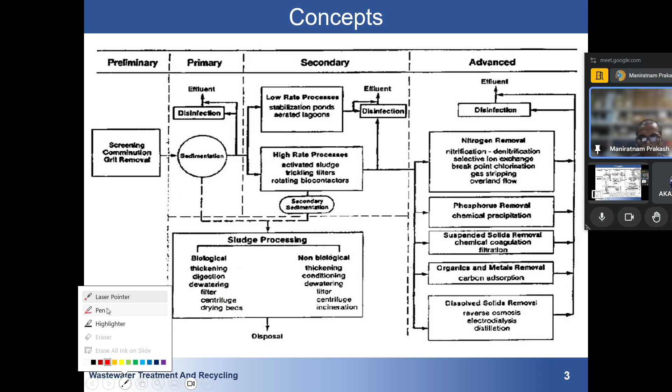So this is the background. If you see the preliminary treatment, we were collecting grit and all this. Similarly, in primary treatment we were collecting - you can see that our primary tank looks like this. This was our primary sedimentation tank. Here there was this settling zone, and at the bottom of the settling zone we saw that sludge was managed.

Then we have secondary treatment, that is biological treatment, and here we also see that organic components are degraded and decomposed with the help of microbes. So generally, in primary treatment we have inorganic sludge where the amount of inorganic content is high, but here in secondary treatment we will see that the sludge produced has a high amount of organic content.

In the upcoming slide we will look into the advanced process, which only starts after this secondary treatment. So in this lecture we will look into sludge processing - we have biological sludge that is generated from secondary treatment, and non-biological sludge, with high amount of inorganic content, that is generated in the sedimentation tank.

Okay, so I will just be going through some basic things, different terms which are used in sludge management. So the first topic is introduction to sludge management, which is what we were discussing.

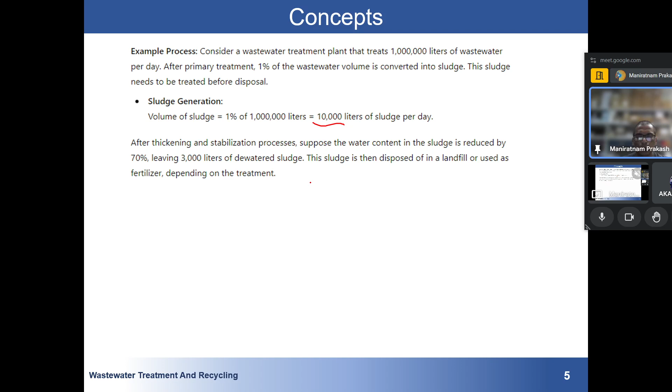So this is a kind of numerical question. After thickening, in the stabilization process, suppose the water content is reduced by 70%. Now we know there was one process - we have gone through different processes now, like thickening, so it's just saying imagine that 70% is thickened. So this much amount of dewatered sludge, this much liter, if 70% of water has been removed, then this much will again contain some sludge and some solid. Then this sludge is disposed of in land or landfill or used as fertilizer, depending upon the type of treatment which you have done. Depending on that, this can either be disposed of or reused.

Based on this, I have one numerical question: a wastewater treatment plant processes 5 into 10 to the power 6 liters of wastewater per day. During primary treatment, 2% of the wastewater volume is converted into sludge. The sludge initially has a solid content of 4% by weight. After dewatering, the solid content of the sludge increases to 25%. Then we have to calculate these three things.

That is volume of the sludge generated per day, and the mass of the solid in the sludge before dewatering. And the mass of dewatered sludge after the water content is removed. We have to calculate all these three things, so I will be going one by one.

So in the question, it's already saying that 2% is getting converted into sludge. Then volume of the sludge will be whatever the water is coming into, 0.02 into 5, that is 10,000 liter.

It was saying that the sludge has initially a solid content of 4% by weight, means whatever the weight is there, 4% is solid, and after dewatering, solid has increased to 25%. So we will be assuming some density, and we know the density of water is 1 kg per liter, and the mass of the sludge is the total mass. Then since 1 liter of sludge is equal to 1 kg.

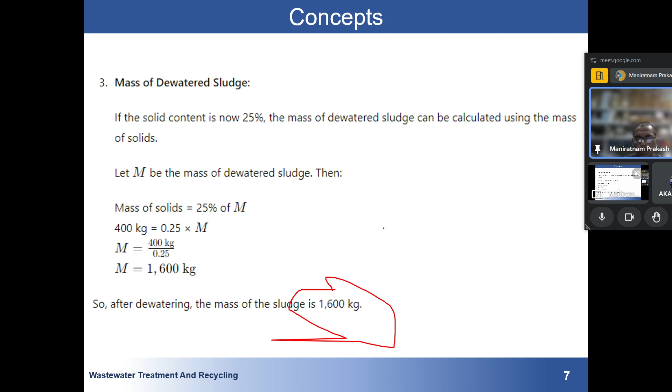So coming to the next topic, that is wastewater sludge quality and characteristics. Wastewater sludge is a semi-solid material that remains after treatment of wastewater. We already know that the quantity, quality and characteristics of sludge can widely depend upon the type of wastewater, the treatment process, and the efficiency of treatment plant.

Understanding the quality is crucial for proper sludge management. So if you know how much sludge is coming to you and what are the different characteristics, like how much organic content and inorganic content, then you can easily manage whether you have to do some kind of biological treatment. Suppose if high organic compound is there, then you will have an idea what you have to do.

You have to treat it aerobically or anaerobically, so that you can get manure and other such things. And if you are treating anaerobically, you will be getting methane also.

The quantity of sludge generated depends upon several factors, including the volume of wastewater treated and the efficiency of treatment process. It is usually expressed as a volume or mass per unit of treated water. So you can remember that whatever amount of water is coming into our system, depending upon the efficiency, suppose if 90% efficiency is there, depending upon that we will have sludge production.

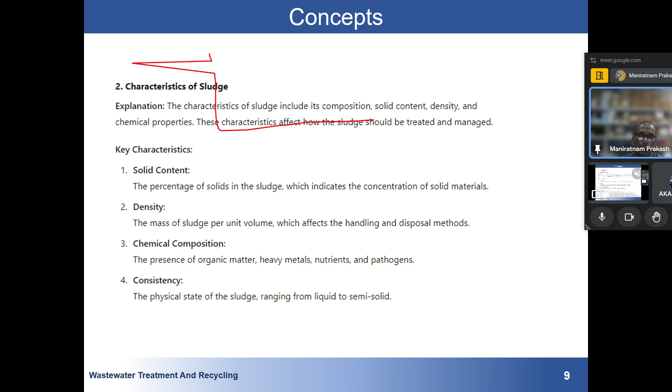So knowing the density matters because sometimes in your treatment plant, sludge production happens at one location and sludge management happens at another. So you have to carry your sludge from here to there.

So if you know the density of your sludge, then suppose if you are using one truck that has a certain capacity, by liter or by kg of sludge weight it can take in one trip. You already know the volume, how much volume is coming, and if you know the density, you can calculate the mass.

Then you can calculate that in a single trip the truck can take this much amount, and if three times that amount of sludge has been produced, then the truck will be making three trips from here to there, so you require three trucks.

Then chemical composition, the presence of organic matter, heavy metal, this is important. Depending upon how much organic matter is there, the sludge will be used as manure or for production of methane. If heavy metal is there, then we can extract the heavy metals and further process it. If toxic heavy metals are there, we have to dispose it in a proper landfill. If pathogens are there, it can spread through water and through air, so we have to take proper care of that.

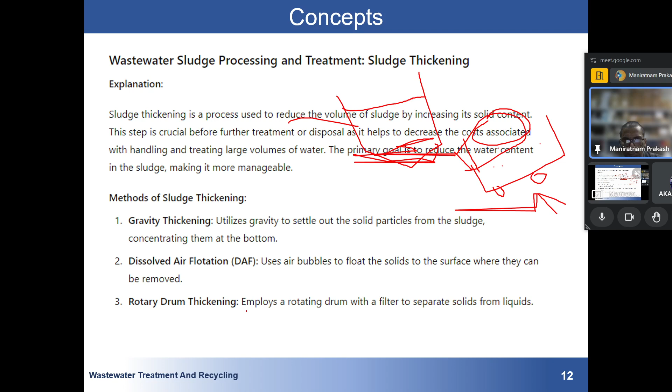We will pass air through these holes, and what will happen is all the solids will start coming to the top, and we can remove those solids. Then we have rotary drum thickening, which uses a rotating drum with a filter to separate the solids and liquid. Sludge will be kept here, and there is some arrangement where the solids get separated. You can search online to find more about rotary drum thickening.

We have another question related to this topic: a sludge thickening system is designed to operate at a flow of 50 liter per minute. The system operates for 24 hours. The sludge entering the system has a solid content of 2% and leaves with a solid content of 10%. Calculate the total mass of solid entering each day and the total mass of solid leaving the system each day, and determine the mass of solid removed by the system each day. So you have to calculate three types of mass. You can assume the density from the previous question if needed.

If you have to assume any kind of density, you can assume the data from the previous question. Okay, so I will give you.

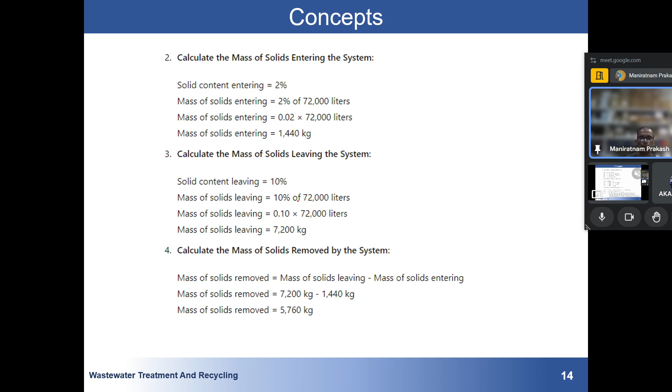I hope this is okay to you. Then finally we have wastewater sludge processing and treatment, covering sludge stabilization and conditioning.

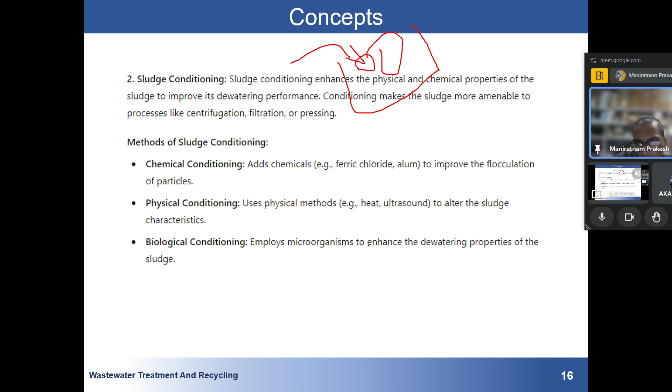If we want to settle the solids present in our sludge, we add some chemicals, and with time it will just settle down. Physical methods can alter it using heat or ultrasound. Then we have biological conditioning, which employs microorganisms to enhance the dewatering process, since somehow we have to remove the water. Now again we have one question related to that topic.

A wastewater treatment plant processes a certain kg of sludge daily with an initial solid content of 2% by weight. The plant utilizes lime to condition the sludge, which increases the solid content to 6%.

Remember, the amount of solid is fixed. If solid content is increasing, remember the water is going away from our system. Nothing is happening to our solid.

The lime addition process is desired to improve the dewatering efficiency by reducing the volume of sludge by 60%. Whatever volume is coming, 60% reduction means only the volume of water is being reduced, because we don't want to throw away our solid.

If some efficiency is there, like if the system is working 100% efficiently, all the sludge stays in the system. If the system works at 90%, then only 90% of solid remains in our system. If the density of the conditioned sludge is approximately 1.3 kg per liter, calculate the final volume of conditioned sludge produced daily and the mass of lime added, if 10 kg of lime is used to condition 1000 kg of sludge.

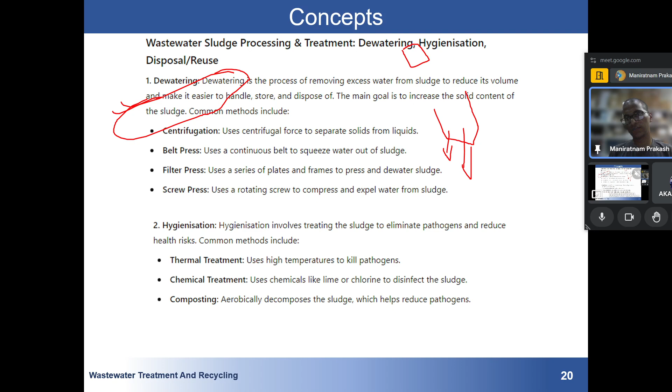Then we have belt press. There will be one rotating facility, then a belt will pass over this, and sludge will be passed through in between. As it is pressing, the water will escape from the system, and the sludge will get collected at another end. Then again we have filter press, and screw press. These are some kind of mechanical mechanisms via which we can reduce water.

Then we have another process known as hygienisation. Hygienisation involves treating the sludge to eliminate pathogens and reduce health risks, using high temperature to kill pathogens.

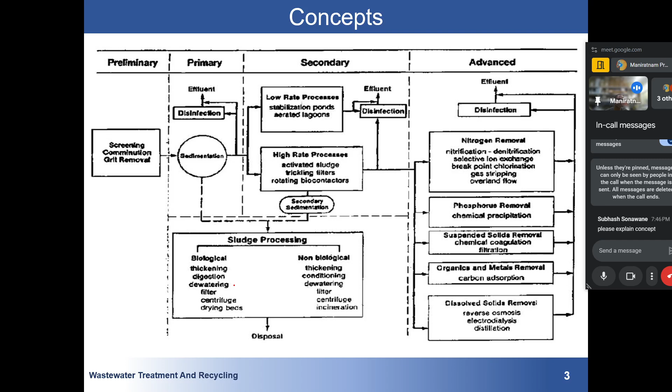Sludge is nothing but a semi-solid byproduct containing organic matter. Semi-solid means there will be water and there will be some solid, and a huge amount of water will be there. Now, density of the sludge generally varies between 1 and 1.5. We will be seeing some numerical questions now, generally between 1 and 1.5.

During management, we know our final aim is to get some byproduct. To get that byproduct, there are different processes we have to manage. Either we can throw it in a landfill, but first we have to remove the water. So to remove that water, there are different facilities we will be looking at, and once the water is removed, whatever solid remains, we can either dispose of it or do other things with it.

So the different processes in sludge management: the first is known as thickening. Initially a huge amount of water is there, so before doing any advanced treatment, we first want to extract the water, reducing the water content of the sludge. Then the amount of water will still be high, but less than the initial value, and there will be some solid, which will generally be organic in content, producing some odor and pollution.

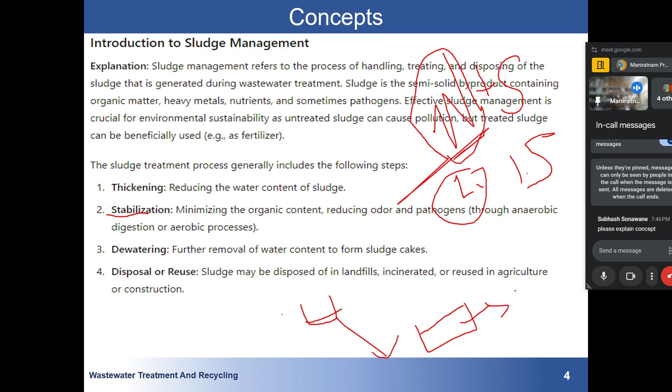That solid can either be disposed of or reused. Depending on our treatment, it can be disposed of in landfills, incinerated, or used in agriculture as fertilizer, or at a construction site. It all depends on the quality.

So here is one question related to this topic — try to solve it. Those who have just joined, try to solve this question too.

Assume a wastewater treatment process handles this much liter of wastewater per day. During primary treatment, 2% of the wastewater volume is converted into sludge. The sludge initially has a solid content of 4% by weight. After dewatering, the solid content of the sludge increases to 25%. You have to calculate three things: volume of the sludge generated per day, mass of the solid in the sludge before dewatering, and mass of the dewatered sludge after water is removed.

Take your time. If you have to assume any data, you can assume it.

This is a very simple question. Remember, as I said, there is a system: suppose primary treatment was done, so this much water was coming in, and 2% of that water got converted into sludge. Now in this sludge we have to remove water. It's saying that the sludge contains 4% solid content, and here you will need density, so you can assume density equal to 1 kg per liter.

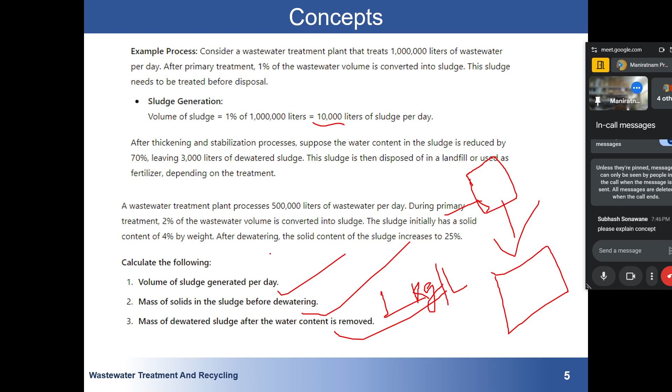So I am going to the solution. You can see that the volume of sludge generated per day is 2% of whatever solid wastewater was coming in. So the volume of the sludge will be 10,000 liters.

This was very simple. For the mass of the solid, I have assumed 1 kg per liter density, so the mass of the sludge equals its volume in kg. The total mass of sludge is this much. Since I assumed the density of the sludge is also 1 kg per liter, the mass of the sludge equals the volume, that is 10,000 kg, and 4% is the solid.

So 4% of this will be the mass of the solid. Before dewatering we have 400 kg — remember this 400 kg. This was very simple. Now one thing has to be understood: remember, suppose initially there was some water content and initially there was some solid content.

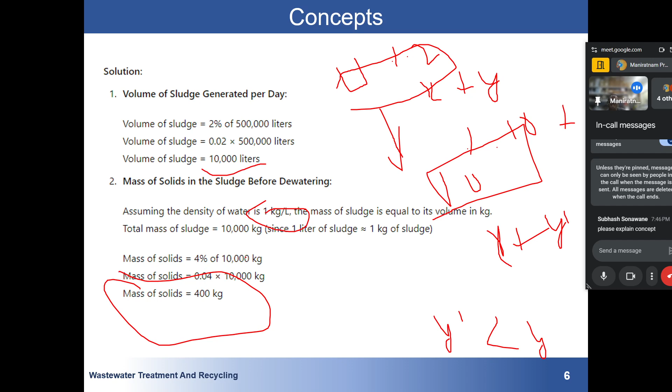So you can see that this much kg of sludge was coming into the system, and after dewatering we have this much kg of sludge, 1600 kg of sludge. I hope this is clear to you.

If anyone has any kind of doubt, you can just ask. Both of you, have you understood, all persons who are there? Four people are there or three people are there? Sobhan and Subhash and Akash.

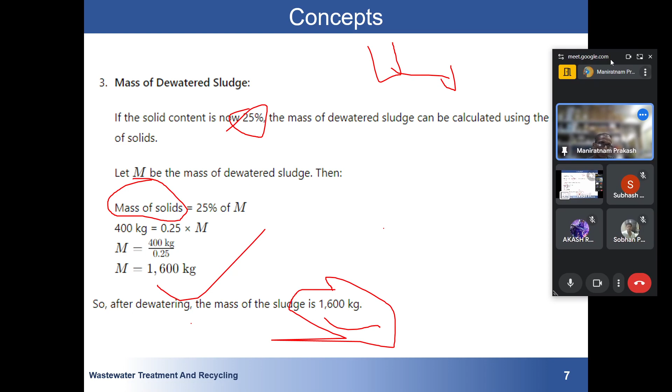If you have understood it - I was just explaining there is one quality of the sludge, how much quality of the sludge you should know. Depending upon that, you will be designing your treatment method, and it generally depends on how much wastewater is being treated. Then we have characteristics of sludge, that is solid content, what is the density, what is the chemical composition, and all these things. So that will be the characteristics of sludge.

Here I have already said what you have to assume. You have to assume the density of wet sludge and the dewatered sludge as 1.1 kg and 1.2 kg per liter.

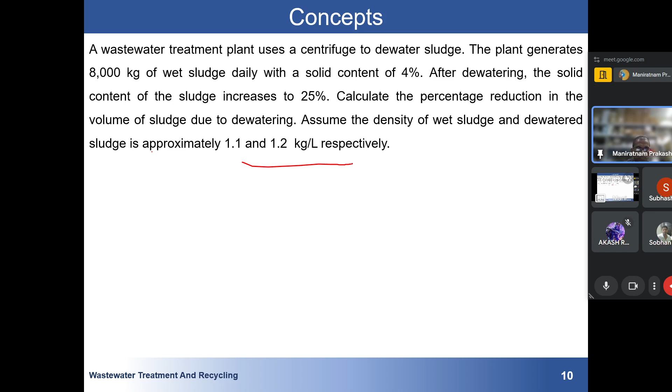Okay, so I'm calculating it. First we will be calculating the mass of the sludge. Initially it is saying that initial solid content is 4%. The mass of the solid will be 4% of 8,000 kg of the sludge, that is 320 kg.

Now we will be calculating the volume of the wet sludge. Density is already given to you as 1.1, and we know that the wet sludge is 8,000 kg, so the volume will be 7272.73 liters. I hope these two steps are very clear to you.

As we have to calculate the volume reduction, so we'll be calculating volume.

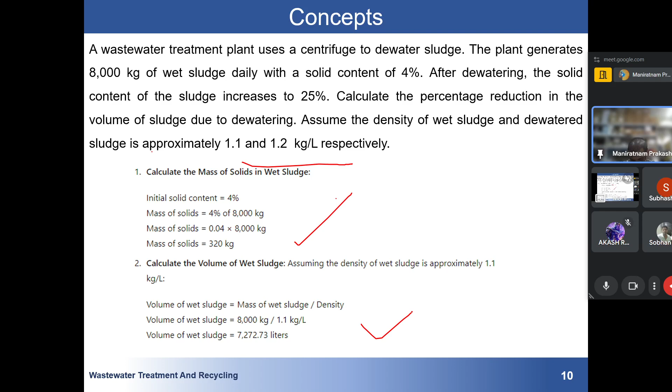Now let's calculate the mass of dewatered sludge. Again, this 320 will be fixed. So we will be utilizing this formula: mass of the dewatered sludge is mass of the solid divided by solid content. The mass of solid will always be the mass of sludge into solid content. The mass of the solid is 320 kg, that we found from here, and the solid content is 0.25. Then the mass of dewatered sludge will be 1280 kg.

And we have assumed that density is equal to 1.2 kg per liter. So the volume of the dewatered sludge will be the mass of dewatered sludge divided by density. So initially we have this much volume of sludge, after dewater we have this much volume of sludge. Then reduction can be calculated by initial minus final divided by initial into 100.

We will be putting it in. So you can see that there has been a reduction of 85% in the volume of the sludge.

Now if someone asks why we are reducing the volume, can someone answer it? Why are we reducing the volume of the sludge?

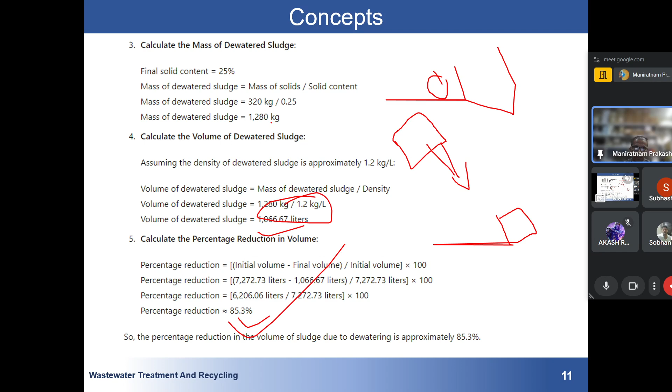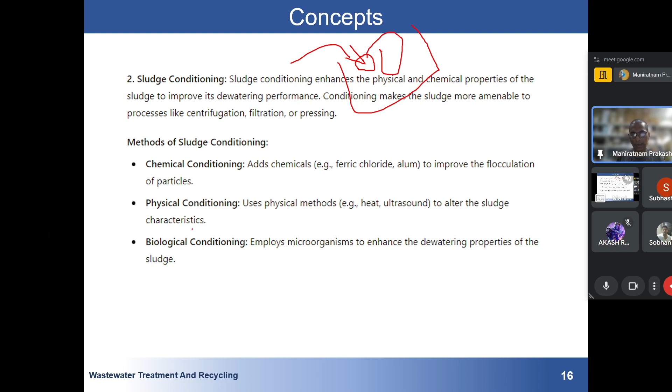As I was saying, different processes are anaerobic digestion, aerobic digestion, lime stabilization. In lime stabilization we add some type of chemicals. Now in sludge conditioning we are also adding some chemicals, biological. Again there was one question related to lime, how much lime we have to add. So I'm moving forward because no one is responding.

Now if you start solving this question, I might wait for you. You don't have to.

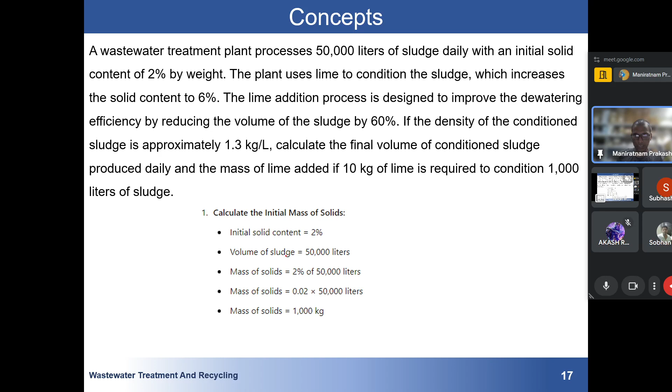Then here it is saying that initial solid content is 2%. Volume of the sludge is 50,000 liter, mass of it is 2%. And I have assumed again that the sludge which is coming has a density of 1, so the mass of solid will be 1,000 kg. Now again I have assumed 1 kg per liter. Then finally 6%, the mass of dewatered will be mass of solid, and we know that the mass of the solid will be fixed.

So mass of solid divided by solid content gives mass of dewatered sludge, this much. In the question, density of the condition sludge is given as this much. Volume of the sludge will be mass of dewatered sludge divided by density, so this will be the volume of the dewatered sludge.

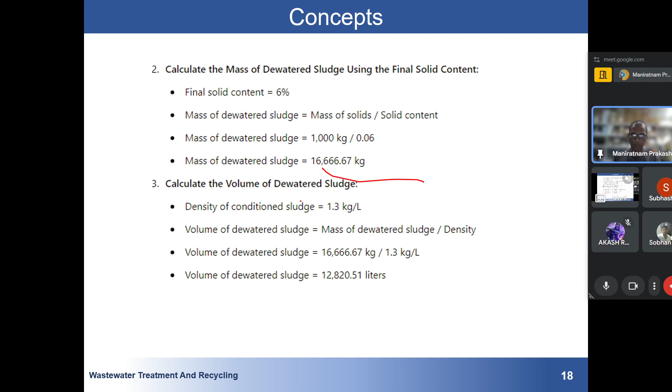Condition sludge means dewatered sludge, you can say. The initial volume is 50,000 liters, reduction is 60%, so the final volume will be this much liter. So this was the same question but in different terms.

Now, lime required is 10 kg per 1000 liters, and total volume is 50,000 liters, so lime required will be 500 kg. I hope this is very clear to you.

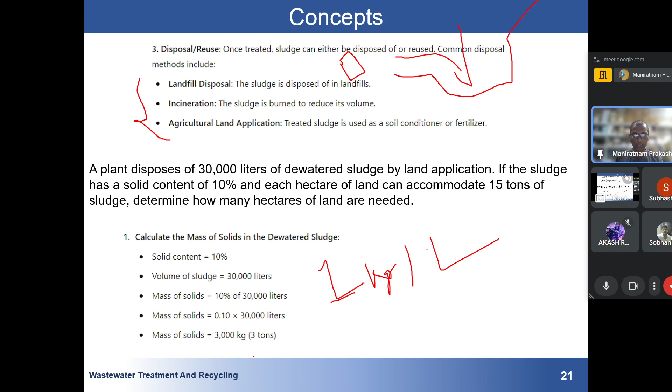Then again we were discussing about disposal and all this thing. A simple question was there: this much water is there, 10% solid content, then how much land will be required? So 10%, 0.1, 3000 kg density, we have assumed 1 kg per liter, then 3 ton, then 15 ton of the sludge. Total mass is 3 ton, then number of hectares required will be 0.2 hectare. This question I have not discussed.

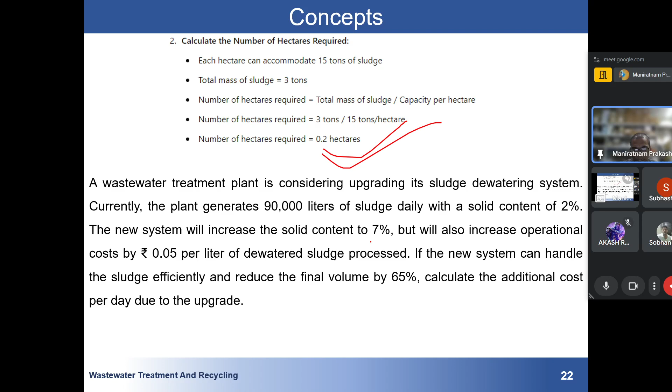Finally we have dewatered sludge using this final value. Now we know that this much solid will always be fixed, and the final solid content is 7%, that is after this thing. Finally we have 7%, so the mass of the solid will be this much divided by 0.07, then mass of the dewatered sludge is this much kg.

In the question it is written that the dewatering process reduced the volume by 65%, so the final volume will be 35% of the initial volume, and initial volume we have is 90,000 liters. So final volume will be 0.35 into 90,000 liters, that is final volume equals 31500 liters.

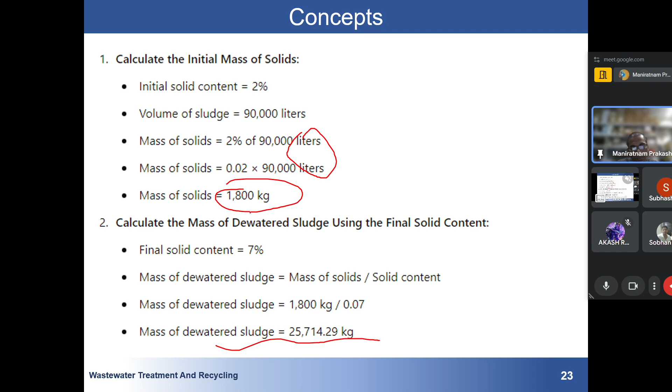Now, additional cost per liter is 0.05. Remember what we have used here: the concept that after dewatering, one thing which is fixed is our mass of solid. We have used the concept of that thing. Whenever we are dewatering, increasing or decreasing our solid content, the mass of solid is fixed, only the volume of water is changing. Due to that, there will be increase or decrease in solid content.

So again, the final volume will be 31500 liter, and additional cost per liter is 0.05. So additional cost will be additional cost per liter into final volume, which is 1575. So to upgrade to the new sludge dewatering system will result in additional operational cost of 1575 per day. I hope this is clear to you.

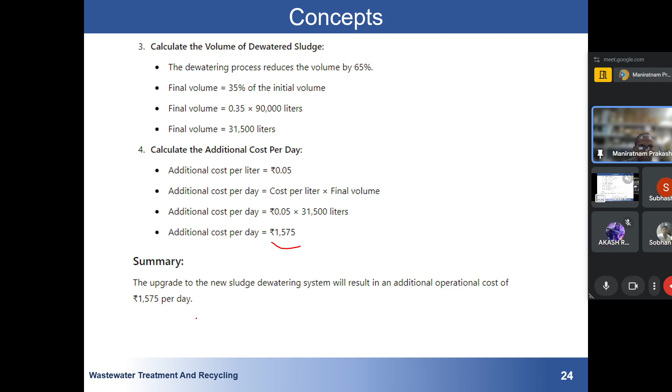So these were some of the few concepts which I have discussed today. Now we have the same question again which is being asked to you in the assignment, so try to answer this ABC multiple choice question.

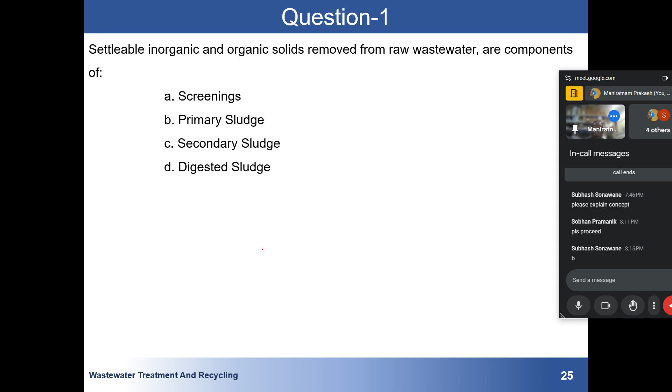So we will be looking one by one. In wastewater, three types of sludge are generated.

Various types are as follows. At a screening chamber, materials like plastic, paper, and rags are removed from the raw wastewater through the screen at primary preliminary treatment. They are not considered sludge.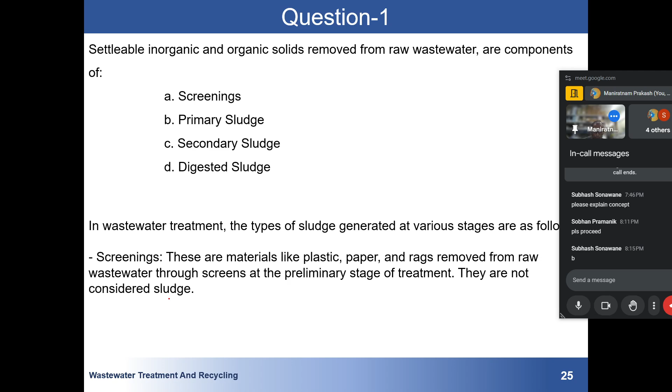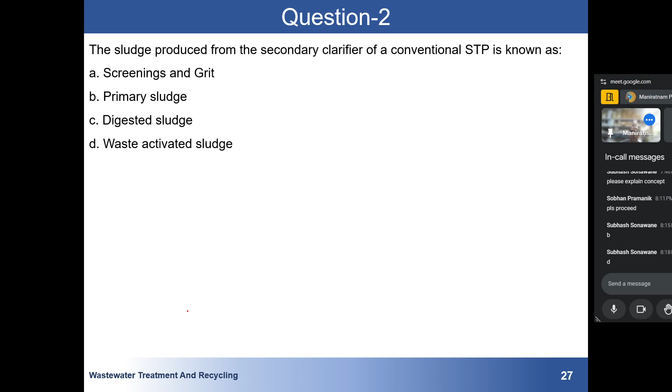Screening and grit are materials removed during the primary preliminary treatment. Screening includes large debris like plastic and paper, while grit consists of inorganic material like sand and gravel. These are not produced in the secondary clarifier.

The primary sludge is generated during the primary treatment stage where settleable solids are removed from the raw wastewater. It is different from the solids produced in the secondary treatment. We already discussed this.

Then finally we have digested sludge. This is sludge that has undergone anaerobic digestion. We have already discussed all these things.

Then we have waste activated sludge. This sludge is produced from the secondary clarifier as a result of biological treatment. We have discussed this. It consists of the excessive biomass generated by microorganisms during secondary treatment, which is then removed and requires further processing and disposal.

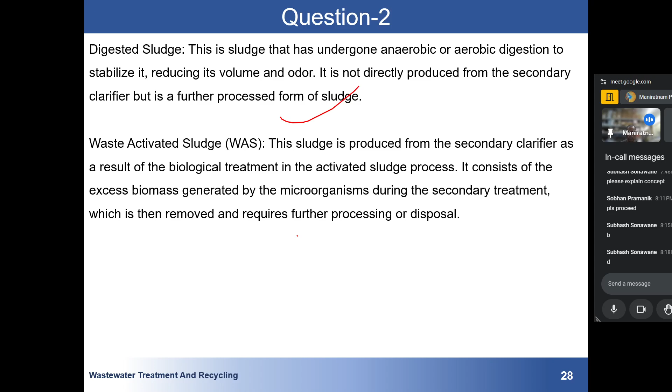So yes, you are correct. From the STP, sewage treatment plant, we have this waste activated sludge. So this will be our correct answer.

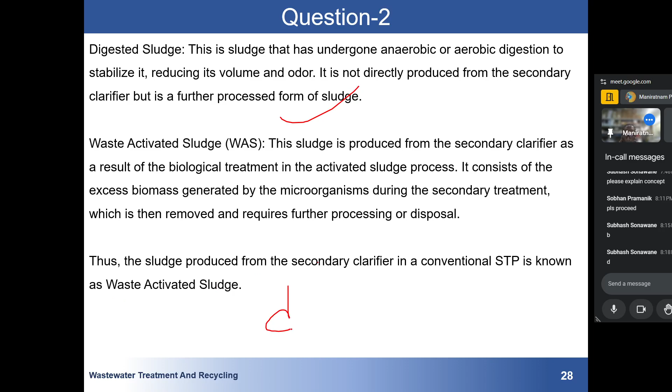Let me see what is the answer.

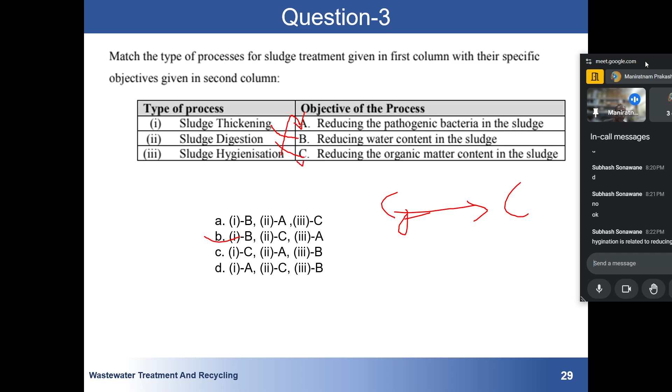So here you can see also this sludge thickening: aimed at reducing the water content in the sludge. By concentrating the sludge, it becomes easier to handle. Thus, the objective is B.

This involves breakdown of organic matter by microorganisms in the sludge. The primary goal is to reduce organic content and stabilize the sludge. Thus, the answer is C.

Finally, sludge hygienisation is to reduce the pathogenic bacteria in the sludge to make it safer for disposal or reuse. We don't want to throw our sludge which contains high amounts of bacteria and all these things. I hope this is okay to you, I hope you have understood it.

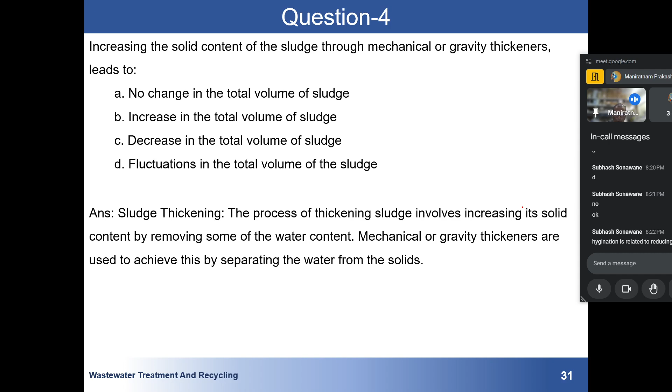This is a very simple question. Sludge thickening: the process of thickening involves increasing the solid content by removing the water content, mechanically or by gravity thickener, achieved by separating the water from the sludge. Okay, so the thickening...

So you can say that when we are thickening it, we are just reducing water content. So the overall volume of the sludge will decrease. So the answer is decrease in the total volume, that is answer C.

So you can see mechanical thickeners are used, mechanically, by rotating drums and all these things. Gravity thickeners we have. Then impact of volume: decrease in total volume as the water is removed. The volume occupied by the sludge decreases because the remaining sludge has a higher concentration of solids. The overall volume of sludge reduces with the water content. I hope this is clear to you.

C, yeah, C is the correct answer. Good.

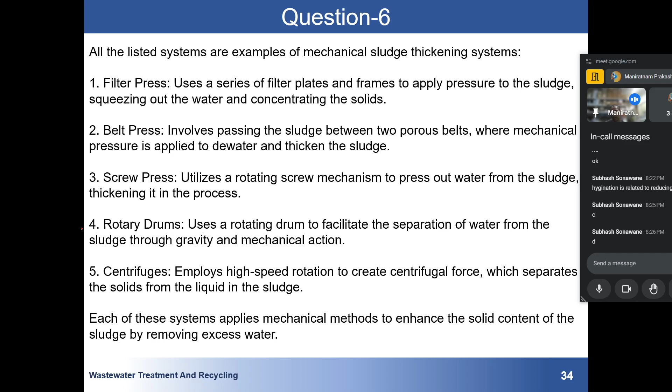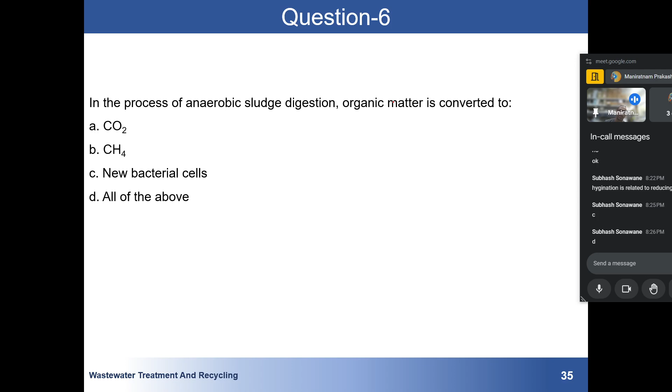Please answer this question. In the process of anaerobic digestion, organic matter is converted to... So we will be seeing this thing. In anaerobic sludge digestion, several key biological reactions occur. Here are the primary ones. So we know that there are four processes, and then we have bacterial growth also.

So first will be hydrolysis, such as complex organic matter being broken down into simpler compounds. Complex organic matter will be there, it will break into simple sugar plus amino acid plus fatty acid. That is, if sucrose is there, which is very complex, then it will be broken into glucose and some other forms.

Then we have acidogenesis, meaning formation of acid. Simple compounds are converted into volatile fatty acids, hydrogen, carbon dioxide, and other byproducts by acidogenic bacteria. The simple sugar which was here, so initially it was here, so again what will happen is this will be converted into some acetic acid and some other kinds of acid also.

This means different kind of acid along with hydrogen and CO2. Yes, you have given D. Then we have acetogenesis, that is formation of acetic acid. Volatile fatty acid and alcohol are converted into acetic acid, hydrogen, and carbon dioxide. So again, what will happen is...

All the acid which is there will be getting converted into acetic acid with another bacteria. And finally, this will be converted into methane. Okay, now,

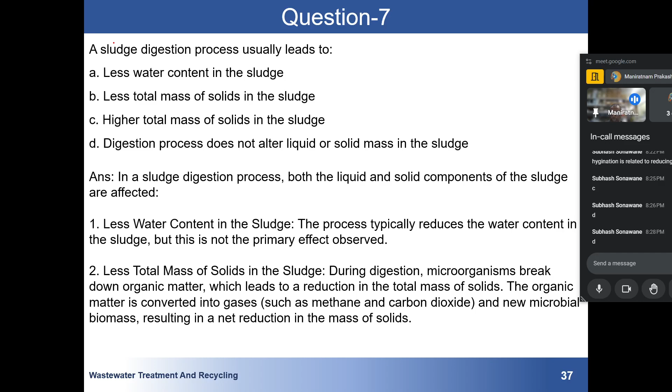I hope this was also a very direct question. The higher total mass option is not correct, as the digestion process generally reduces the total mass. Remember, we are talking about digestion. Digestion means we are digesting organic matter. So if we are digesting organic matter, it's simple: the mass of the organic matter will decrease. So the correct answer is B.

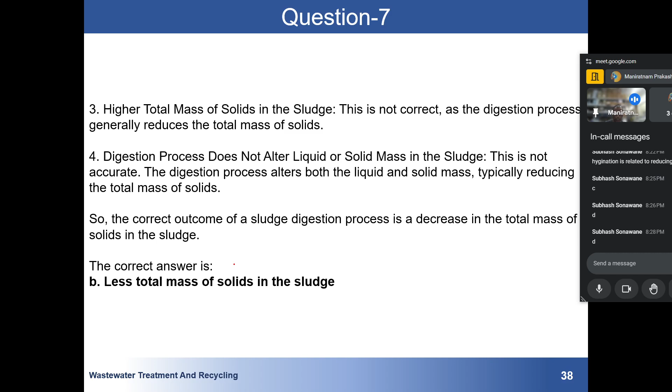Please participate, I don't know why you are not participating. The higher total mass of the sludge option is not correct, as the digestion process generally reduces mass during digestion. The option that digestion does not alter liquid is also incorrect; digestion process alters both liquid and solid, but the amount of liquid altered is very less. So the correct outcome is a decrease in the total mass of the solid in the sludge.

Question number 8: coagulants such as ferric chloride, alum, or organic polymers may be added to wastewater sludge for sludge stabilizing, sludge thickening... Remember the process and you will be able to answer this question. What is sludge stabilization? What is sludge thickening? What is sludge conditioning? What is sludge hygienisation?

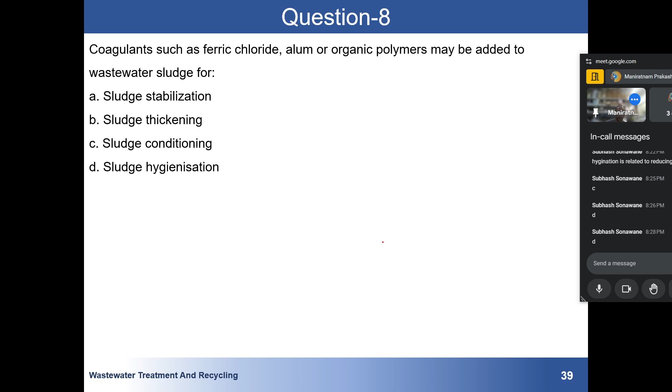So the correct answer is sludge conditioning. Coagulants such as... because we have already discussed what is sludge stabilization, so I have not rewritten it. No, I have written it. So coagulants such as ferric chloride, alum, or organic polymers are typically added to wastewater sludge for the purpose of sludge conditioning. The primary purpose of adding coagulant is to condition the sludge.

Conditioning improves the dewatering characteristics of sludge, making it easier to separate water from solid during the dewatering process. Remember, we want to remove the solid and all these things, so for that we add some kind of chemical. What happens is they agglomerate and form some kind of flocculants, and they can be easily removed. So for that we use this kind of salt, that is ferric chloride, alum, or organic polymer.

Mechanism: coagulants work by destabilizing the particles in the sludge, promoting flocculation and enhancing aggregation of sludge particles. This leads to better removal. Now remember this mechanism: suppose if you have sludge and all the solids are randomly distributed, and you pass it through a process, there will be some reduction in solid. But now imagine another process where you have added some chemicals and those sludge particles have formed some kind of lumps. So which one will be easy to remove? Obviously this one will be easy to remove.

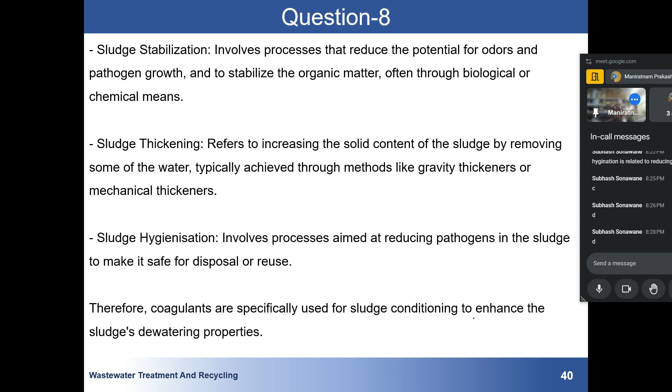Now question number 9: sludge drying beds are one of the simplest methods of dewatering, but they have a larger land footprint.

Dewatered sludge essentially has zero or near zero water content. Remember, no sludge has zero water content, so obviously this statement is incorrect. So my answer will be either A or D.

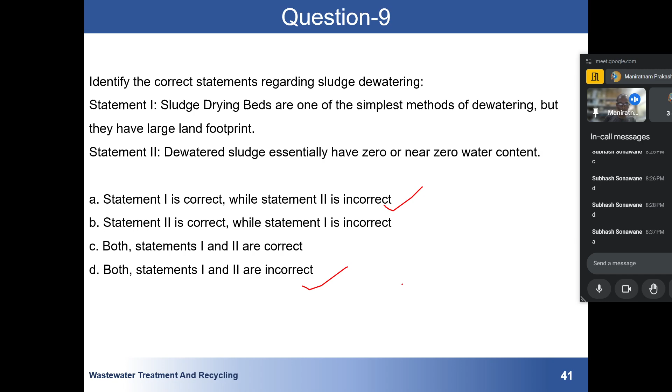Now just think about whether statement one is correct or not. You have answered A. Okay, so I will be moving forward. Yes, the correct answer is A.

We have to know the reason. The sludge drying beds are one of the simplest methods of dewatering, but they have a large footprint. This is correct: sludge drying beds are indeed simple and low cost methods for dewatering. However, they require a large area of land due to the need for extensive surface area.

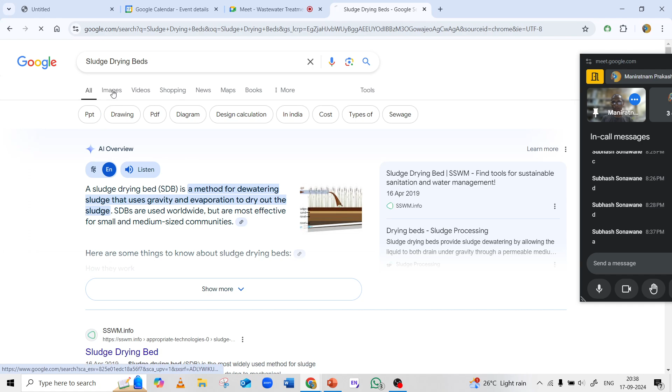So I will show you how big it is. You can see that sludge drying beds require this much large amount of area, so a huge amount of land is required. These are general sludge drying beds, and that's why a huge amount of area is required.

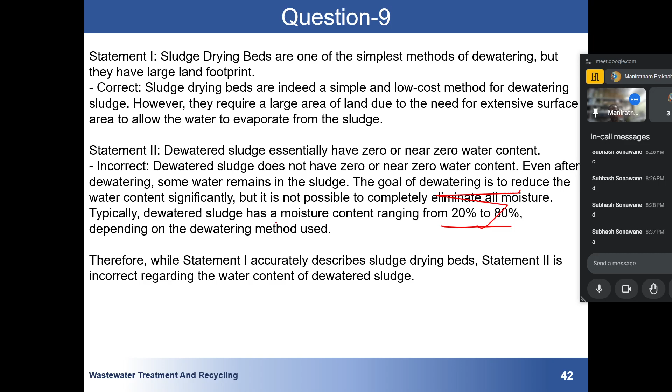Generally, it is on the higher range only, around 80%. So yes, A was our correct answer. Coming to question number 10.

Identify the appropriate option for the use of wastewater sludge: sludge can be used to produce bioenergy, digested sludge can be used as compost or fertilizer, incinerated sludge can be used as building material, or all of these.

Each option listed represents a viable method for reuse. Sludge can be used to produce bioenergy - correct, since sludge, particularly from anaerobic digestion, can be used for production of bioenergy in the form of biogas, which can be utilized for energy generation. Digested sludge can be used as compost or fertilizer - correct, since after digestion, sludge can be treated further to produce compost or fertilizer, and the treated sludge, rich in nutrients, can be used to improve soil.

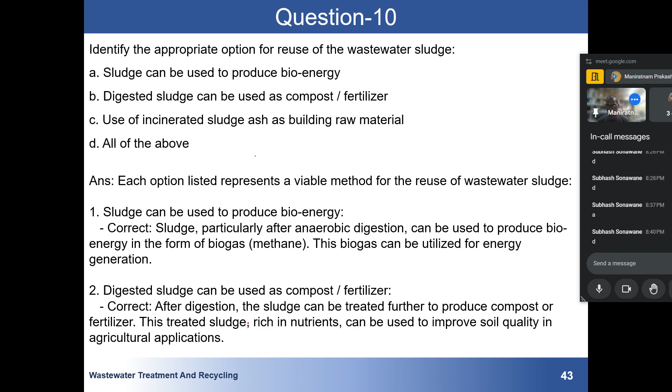Yes, this is also a correct answer, so the answer is D, all of the above. Ash from incinerated sludge can be used as a raw material in construction, such as production of bricks, cement, or concrete. This helps in recycling the ash and reducing the environmental impact. Thus, all the listed options are appropriate.

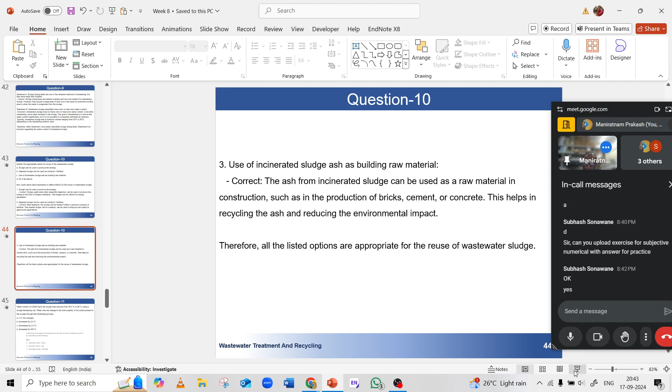Remember, theoretically what I've said, dry solid. Try to answer what is the net change in the total quantity of dry solid. It should not take any time. I have already discussed so much numerical question today.

This was a theoretical question, not a numerical question, but still I am trying to answer it. To calculate, see, initially this much amount of water was there, finally this much water content was there. So what will happen, if your initial water content is this, dry solid will be 1.5%. You don't have to worry, just remember the amount of solid never changes. The answer will be 0%, but I am showing how this 0% is coming.

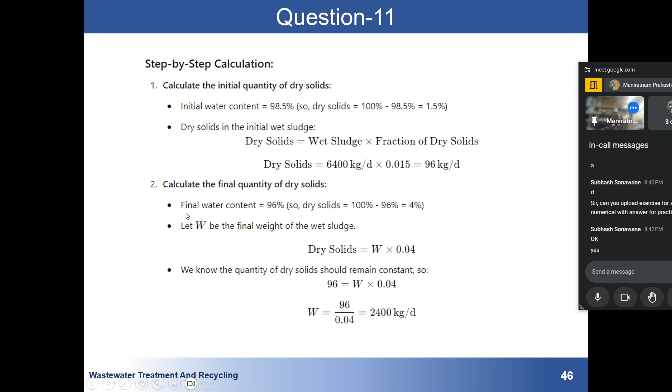So you can see the net change is 0%. The correct answer will be A. Just for sake of convenience I have shown you these things, but these are not needed. By seeing this question, as they are saying the total quantity of dry solid, there only you could have marked answer A. Okay, now coming to the question number.

The ratio of volatile to total solid is 0.75. The sludge is further digested where 72% of organic compound - generally organic compounds are volatile - so what will happen is that if you give a small amount of heat, it will evaporate. Now generally carbon will be converting into CO2.

Neglecting any loss, remember, if you study this total solid chapter from a book, the temperature required for converting this volatile solid - to find the volatile solid we use a temperature of 600 degrees Celsius. So the definition is that which can be easily converted, but the temperature required is around 600. Remember this thing, don't get confused.

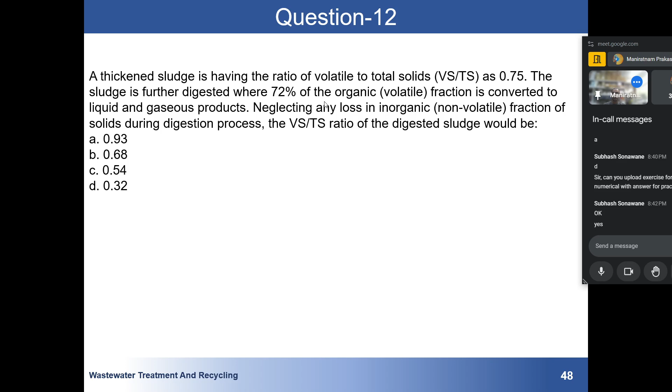Neglecting any loss in inorganic fraction of the solid, the total Vs by Ts of the digested sludge, and after 72% conversion, what will be the ratio of digested sludge? So we will be looking at it here. Volatile solid in undigested solid is 0.75 into total solid, that is given to us. So non-volatile solid will be 1 minus 0.75 into total solid, that is 0.25 total solid.

This non-volatile will remain in our system. 72% is lost, or 28% is remaining. So remaining volatile solid will be 0.28 into 0.75 of total solid, so remaining is 0.21 of total solid. This is very simple. So total solid is non-volatile solid plus remaining solid, that is 0.25 into total solid plus 0.21 into total solid, that is 0.46 total solids.

So we have to find the new ratio. The new ratio will be whatever volatile solid is there, that is remaining 0.21 total, by total ratio, that is 0.46 total. So the ratio will be around 0.68. This was a simple question, I can say, just you have to do some kind of manipulation from here and there.

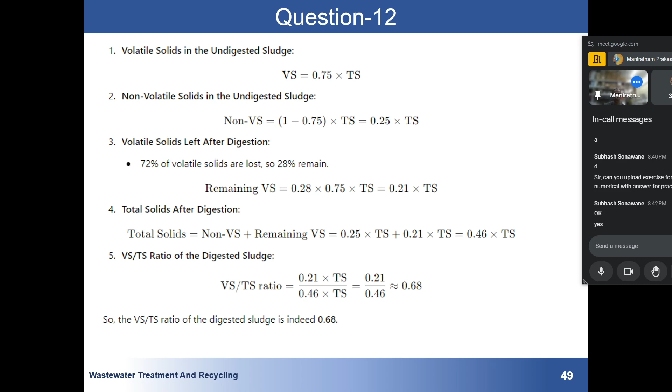Okay, I hope this is clear to you. Again, a question related to what I have already discussed, but still I am going through it.

A secondary clarifier of an activated sludge process produces a certain amount of wet sludge containing 1.8% weight by weight solid content. The sludge is thickened to increase the solid content to 5%. The thickened sludge has a specific gravity of 1.9. The solid fraction is 80% organic, 20% inorganic. The thickened sludge is further processed in an anaerobic digester, and the final amount of dry solid after digestion is 240 kg per day. Based on this information, answer the following questions.

The total amount of dry solids in the thickened sludge - this is very simple. The wet sludge amount is already given to you, 37,000 kg per day with 1.8% solid content, so initial dry solid will be 666 kg per day. So this is our answer - total dry solids is 666 kg per day.

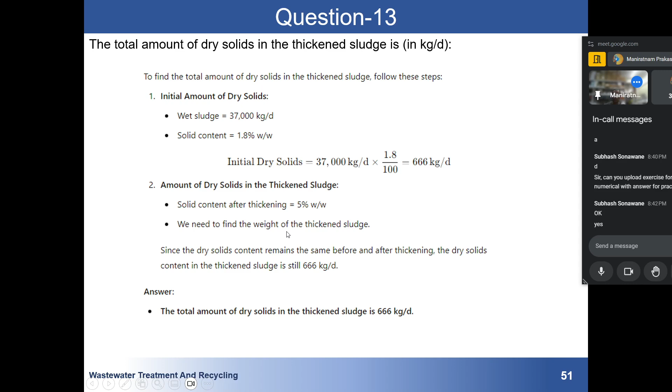The amount of dry solid in the thickened sludge is 5%. We need to find this - second part, that is total volume of sludge produced after sludge thickening in meter cube per day.

After thickening it is 666 kg per day and the solid content is 5% weight by weight, and the density is given as 1.1. As dry solid represents 5% of the total weight, total weight will be dry solid divided by 0.05, giving us the total sludge produced. The specific gravity is 1.1, so we convert to the specified unit and find the volume. The volume will be total weight of the thickened sludge divided by density, which is around 12 meter cube per day. This was also very simple.

We have assumed the concept that total weight of the solid is fixed. In spite of the solid content increasing, the weight of the solid is constant. That's why we divided by that content. So finally we have 12 meter cube per day.

Assuming no reduction in inorganic fraction of solid during digestion, find the percentage reduction of organic content in the solid during digestion. This is a bit lengthy part, but we can solve it. Initially 80% was organic, 20% was inorganic. Final amount after digestion is 240 kg per day.

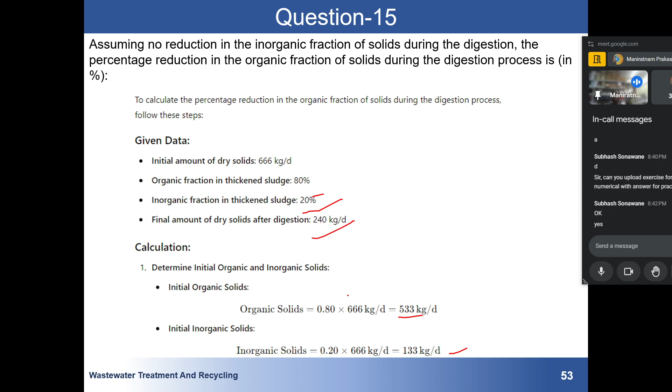So organic is 533 kg because it is 80%, and inorganic solid is 133 kg. Total is 666 kg. The final inorganic content remains unchanged at 133 kg. The final organic content will be total final dry solid minus final inorganic. Final dry solid is 240 and inorganic is 133, so organic content will be 107 kg.

Reduction will be initial minus final. 533 was initial, final is 107, so that much has been reduced. Percentage will be based on 533 initial organic content, with a reduction of 426, so around 80% has reduced. This question and question number 12 were similar questions.

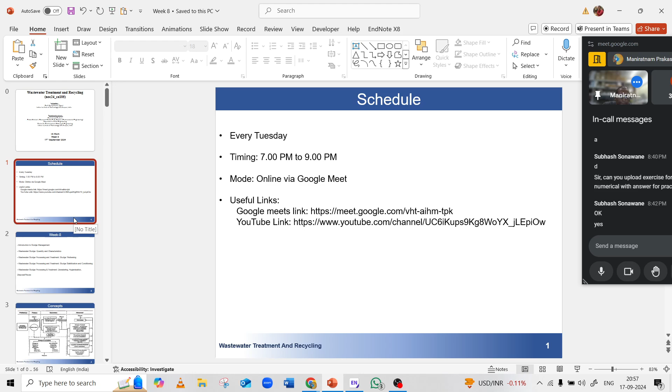For additional practice, are examples available in any book?

Yes, you can refer to Metcalf and Eddy, this book. And there is another book, wastewater treatment by SK Garg - water supply and wastewater engineering, sewage disposal. You will find good examples in this book. Just refer to SK Garg. Or you can also refer to Metcalf and Eddy, 5th edition, wastewater engineering treatment. In these two books I am suggesting, you will find good examples.